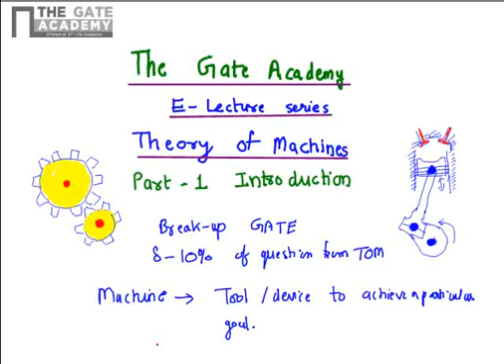This high level definition encompasses all machines around us, be it mechanical, chemical, electrical, or electronics. But if you limit yourself to mechanical engineering, machines are defined as mechanical devices which are used to accomplish work.

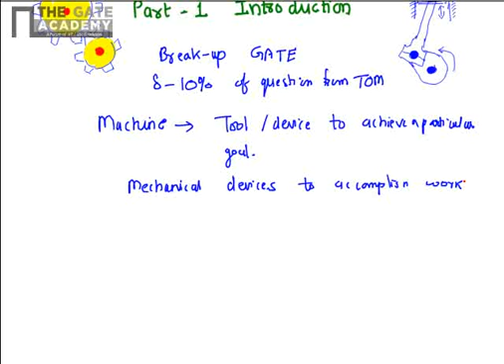As you know from basic physics, work is derived from force and displacement. In a similar fashion, we can break down the definition of machines as follows: machines can be intended to transmit motion, that is displacement, from one form to another.

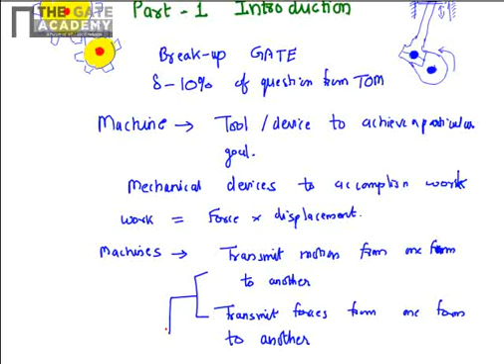They can also be used to transmit forces from one form to another, and also do a combination of both. The combination of force and motion is power, so machines can be used to transmit power from a source to a target in a desired fashion.

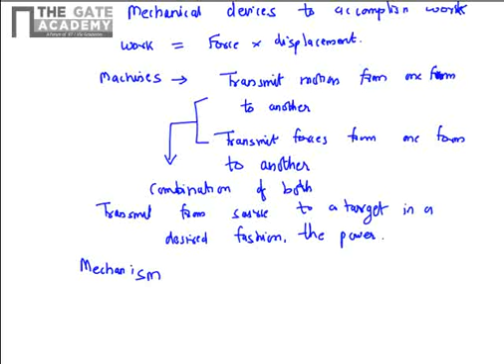So how are machines formed? At the heart of the machine, there are various building blocks called mechanisms, which form the basic building block of a machine.

A machine can be a very simple one, like a stapler, a lever, or a screw arrangement with a nut and bolt, or it can be very complex, like a printing press, sieving machine, industrial manufacturing line, automated robotic lines, gym equipment, presses, or earth movers.

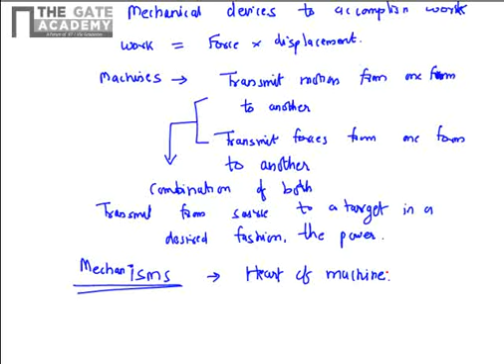But at the heart of all machines, you'll find mechanisms, and various mechanisms are joined together in a particular fashion to achieve a particular force or motion transmission. I'll list out a few examples of mechanisms to help you visualize those better.

You can visualize a lever about a fulcrum, used to transmit force 1 to force 2 in a different fashion. You can apply a lower amount of force on the longer fulcrum side and get a higher amount of force on the other side. So this is used to transmit forces.

Another example is the slider crank mechanism, seen in internal combustion engines. In this mechanism, a rotary motion is converted into a linear motion, so here you see transmission of motion, and here you see transmission of force.

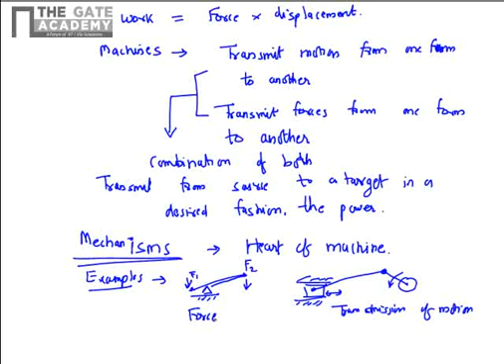Then you have gears. Gears are used to transfer a higher angular velocity to a lower angular velocity, as you may be aware. So it is a kind of motion transmission.

Then we have cams. In a cam, a rotary motion of the cam is converted into linear motion. You also have the screw nut arrangement, which is used to transmit the rotary motion of the screw into linear motion of the nut, or vice versa.

The examples outlined here are just for illustration purposes. The subject is quite vast, and there are many combinations of these mechanisms used to form a machine.

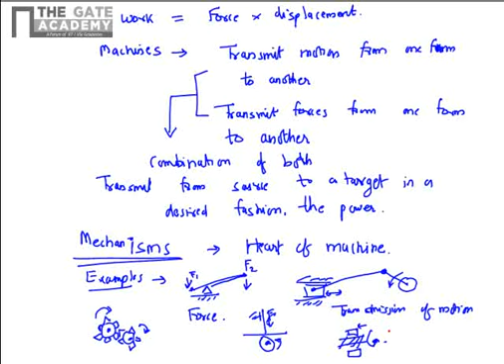Although the subject of theory of machines is quite vast, we have to define a framework or syllabus for this lecture series. I'll now outline the syllabus, listing the topics required to be covered from the perspective of the GATE examination and also as a bachelor's course in mechanical engineering.

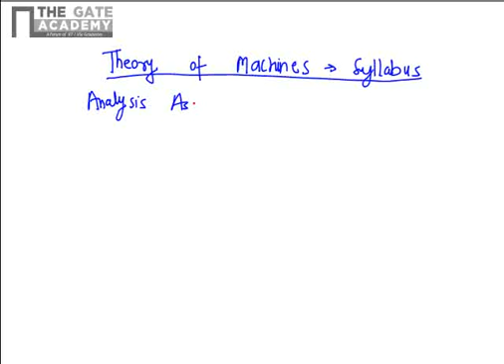But before doing that, I would like to take you through a typical example of a machine, to show you why we need to do analysis of various aspects of machines, and list down what aspects of machines really need to be analyzed as a mechanical engineer.

We will take here the example of a very well-known machine, that is the car. All of you are familiar with this example. Here, as a machine, what is the basic purpose of this machine?

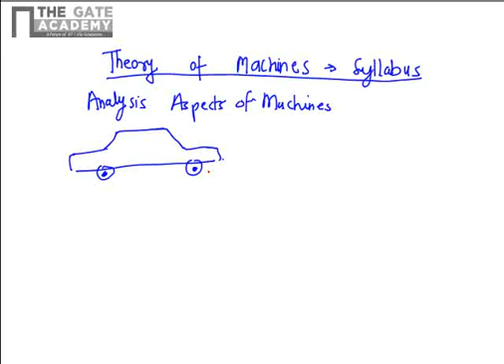It is to convert chemical energy in gasoline or diesel or petrol to mechanical energy and impart motion. So if you look at the heart of this machine, you'll find an internal combustion engine.

This is the liner of the combustion engine. This is a piston, and you are having a crank shaft mechanism. So here, by combustion of gases like petrol or diesel in gaseous state, you get the expansion energy, which is converted into linear motion of the piston. The linear motion of the piston is converted into rotary motion of the crankshaft by this slider crank mechanism.

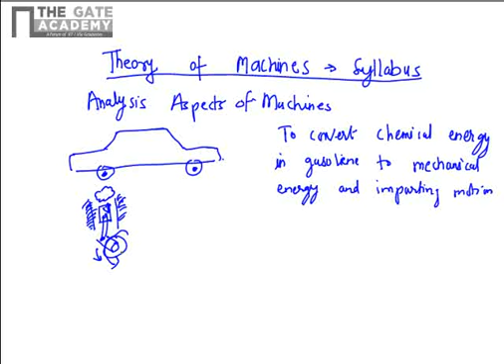This rotary motion is transmitted with the help of gears, or in some cases chain sprockets, like you can see in a bike. This motion is transmitted from the crankshaft to the wheel, and from the wheel, the rotary motion of the wheel is transmitted by friction between the wheel and the land to linear motion of the car.

So here, as you can see, there is transmission of forces and motions from one form to another throughout the cycle. Chemical energy into gas, thermal energy to linear motion or force on the piston, that in a circular manner, the circular motion getting transmitted to the wheels, and that circular motion again getting converted to a linear motion of the car.

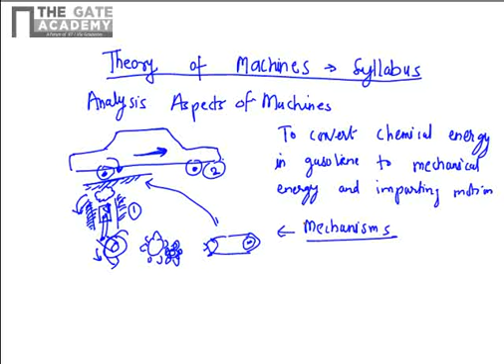However, if you look at various stages in this machine, the forces and velocities involved in initial stages, like maybe one here at the piston, are quite different from what we observe at the final output, that is the linear motion. So this transmission of motion and forces is accomplished with the help of mechanisms. So you can see various mechanisms in action here in this machine. So the first topic that needs to be covered in the subject of theory of machines is mechanisms.

So I've already explained to you about the mechanisms that are the heart of the machine, which allow all the motion and forces transmission. So in the GATE syllabus, in this lecture series, we will understand formation of mechanisms, how various links and joints are joined together, how various components are joined together to form a mechanism. This we will analyze, and later on, these mechanisms as a basic building block can be assembled together to make a final machine.

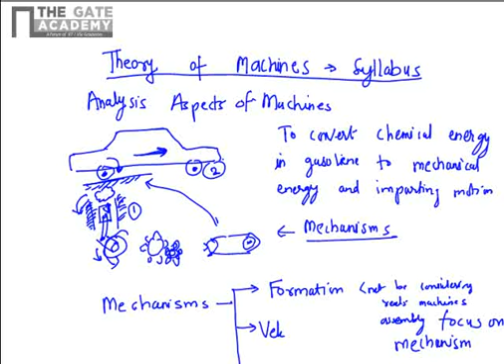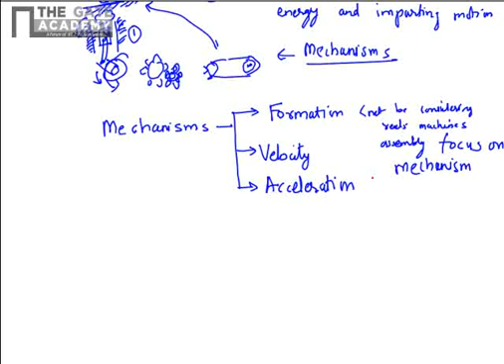So we will not be considering real machine assembly. We will be only focusing on mechanisms, and then it is quite straightforward to later on form an assembly of mechanisms to get the final working machine. So here we will understand the basic principle of mechanism formation. We will analyze velocity of various components in a mechanism, acceleration of various components. Acceleration is important for dynamic analysis, as components are subjected to loads, and this dynamic analysis will also include transmission of forces. This will be covered in the present lecture series.

We will be taking up a few typical examples such as gear train, slider crank mechanism, etc. So the principle of mechanisms will be better illustrated with the help of these examples.

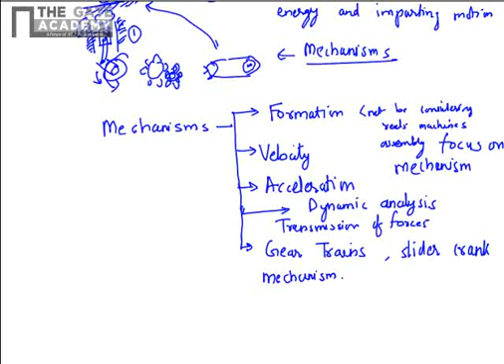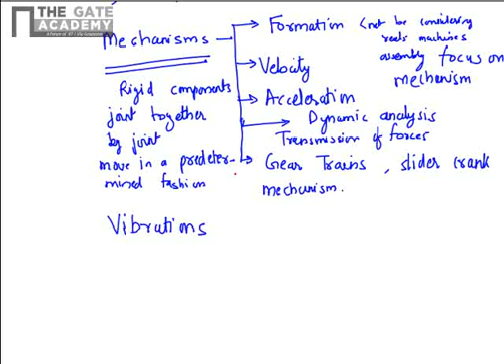The second topic in the theory of machine is the subject of vibrations. The vibrations are also quite important along with the mechanism formation in machines. The basic building blocks in a machine are mechanisms. They are supposed to be rigid components or rigid links which are joined together by joints and move in a predetermined fashion. However, the vibrations do not consider the components to be rigid. So it studies the internal motion of a component in a machine.

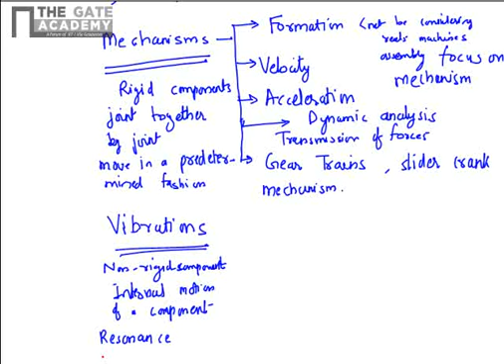It is quite important to understand vibration, to understand resonance of various components, because resonance can sometimes lead to very high stresses in a component and may lead to its failure.

Also, the vibrations are quite important to be studied from the perspective of human comfort, both in terms of mechanical vibrations and acoustics. So you can just visualize the car example. If there are too much vibrations in a car due to the noise from the engine or maybe some transmission gear, clutch, then it will not be a comfortable car, and that will be very detrimental in machine design.

You may be aware that noise is also considered as a form of pollution, and there are various government regulations regulating the amount of noise emitted from a particular machine. So the machine designer has to comply with those regulations. So the subject of vibration is important first to understand the stresses in a component, the dynamic stresses which can lead to component failure, and second to meet the human comfort requirements.

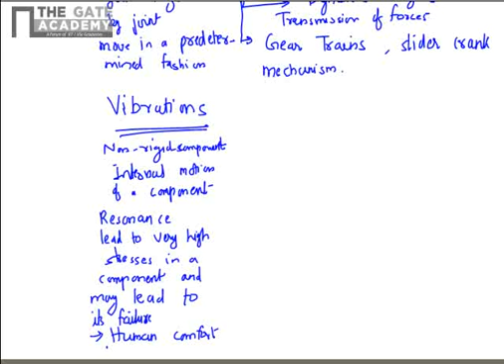So if you see the syllabus of the subject of vibrations, we will be covering free and forced oscillations of a single degree of freedom. So these are basically simple harmonic oscillations of a single body, single degree of freedom, and they may be free or forced. Free means natural vibration of a system. Just you have to move it away from its equilibrium state like a simple pendulum, and then it will keep oscillating about its mean position.

It is something similar to striking a tuning fork. When you strike a tuning fork with a hammer, with an impact, it will keep on resonating about its mean position. So these are free oscillations. In a forced oscillation, you have a driving source which is continuously moving the object, causing resonance in the object.

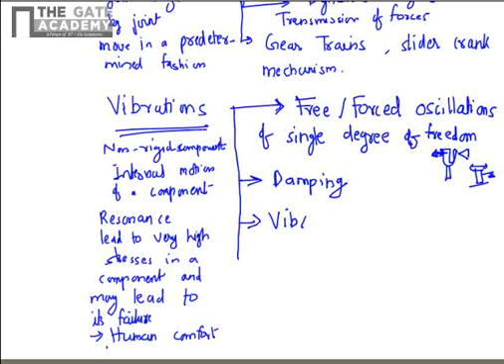So we will be letting you know about these aspects in detail as we move along the course. We will be studying damping of oscillations, then vibration isolation, resonance, critical speed of shafts. The critical speed of shaft is one typical example of resonance. There are many examples, but we will cover those while studying free forced vibration, damping, and isolation, and one other typical example is critical speed of shafts.

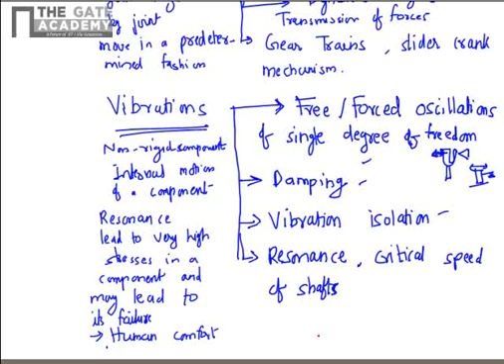So the details of this syllabus we will dig down further deep, what are the various topics that need to be covered when we move to the actual vibrations lecture. But here for now, I just want you to be aware that the subject of theory of machines has two components: first is the mechanism, and second is the vibrations. So now we will go ahead first with the subject of mechanism.